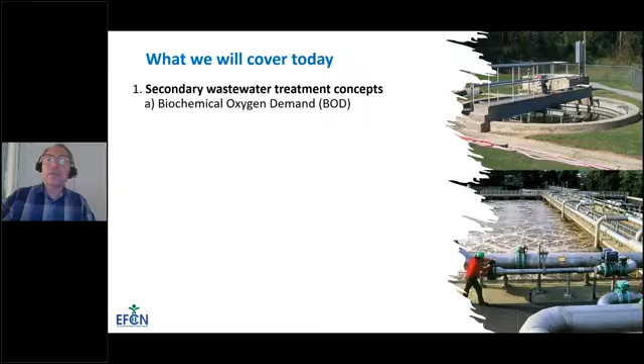Now, today we're going to be covering some different aspects of secondary wastewater treatment. We'll start out by looking at some general principles and delve into biochemical oxygen demand. That's going to be a constant that's similar across the different types. Then we're going to look at activated sludge process control, which is going to cover the food to microorganism ratio and the mean cell residence time calculation.

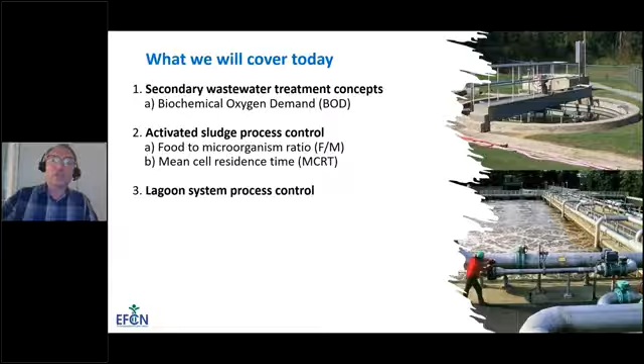We'll even delve into a little bit of lagoon process control. And then we're going to segue into some trickling filter, which is not a suspended process. This is a fixed media process. And we're going to look at organic loading and hydraulic loading. So we're going to look at some different aspects of secondary wastewater treatment, and I'm hoping that we can draw some big picture conclusions. I hope you enjoy the training.

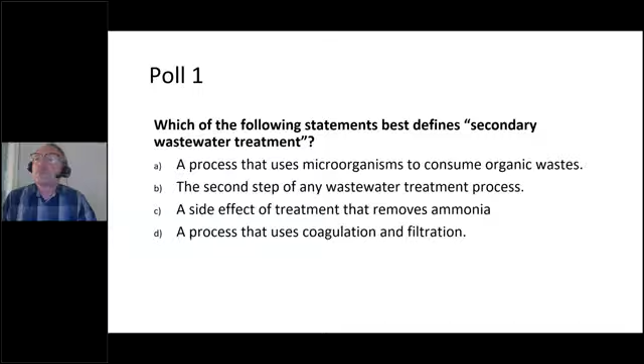We'll go to our first poll now. This poll asks which of the following statements best defines the term secondary wastewater treatment. Owen's going to bring up that poll. I can't actually see the polls, Owen, so feel free to let me know when people have responded and if you could, what the answers are.

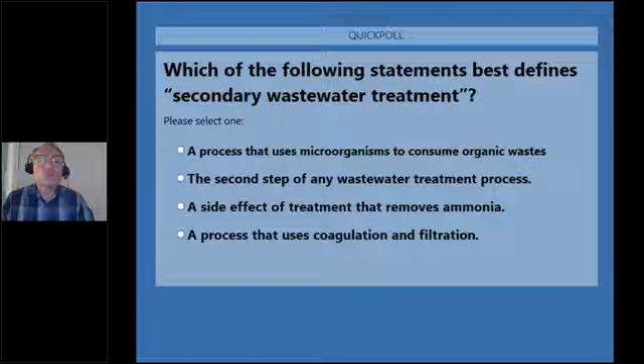Okay, so for the poll results, 71% said a process that uses microorganisms to consume organic wastes. 16% said the second step of any wastewater treatment process. 3% said a side effect of treatment that removes ammonia. And 10% said a process that uses coagulation and filtration.

Okay, very good. Now, if we look up the actual definition of secondary wastewater treatment, that's a term that's used to define any process that uses naturally occurring microorganisms to consume waste. Now it's a little bit of a trick question because it's also called secondary because it follows primary treatment. Primary treatment is settling of settleable solids before the wastewater enters the actual secondary treatment process. The main focus of secondary treatment is to remove BOD.

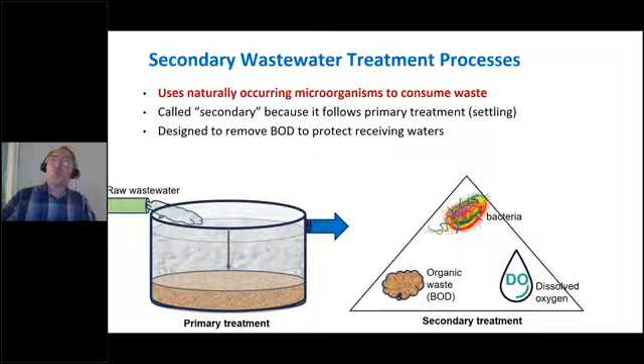A lot of the reasons why we're doing secondary treatment is because if the waste were to get into receiving water, it would continue to cause oxygen depletion because bacteria would be consuming waste in the receiving water, and it would negatively affect the life forms in that receiving water. They wouldn't have sufficient oxygen to breathe, so they'd either move out or die.

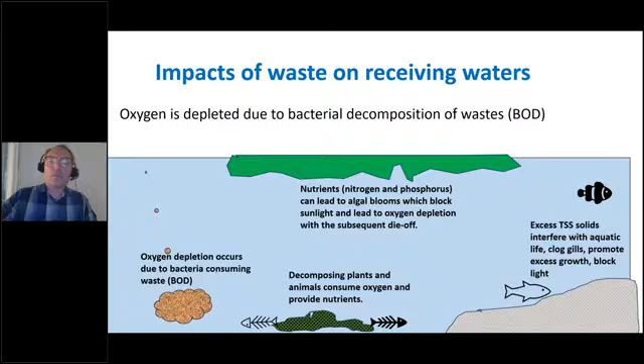Some other things are nutrients, nitrogen and phosphorus, that can lead to algal blooms, and when the algae dies off, that also adds to oxygen depletion. Decomposing matter as a result of all these processes can continue to release BOD and nutrients. And finally, TSS, total suspended solids, can interfere with aquatic life. It can do things like clogging the gills of fish, and also can promote excess plant growth and block light. So these are kind of like the main things that are regulated in an NPDES discharge: BOD, nutrients, and TSS, and of course ammonia as well, which would be toxic.

Now, this biochemical oxygen demand concept is going to be central to all of the process control equations that we'll look at. So let's delve into biochemical oxygen demand for just a little bit here, and we'll define what it is, how it's measured, and we'll end up with a way to calculate the pounds of BOD per day using the pounds formula. So let's look at these couple slides before we delve into activated sludge.

So the BOD is a way to measure the strength of a waste stream. It directly measures the oxygen demand, and it kind of indirectly measures the actual amount of waste that is in a waste stream. So you have microorganisms. When they consume BOD, they require oxygen to do so. And BOD is measured in a 5-day test that measures how much oxygen the organisms are requiring to consume that waste in the sample bottle.

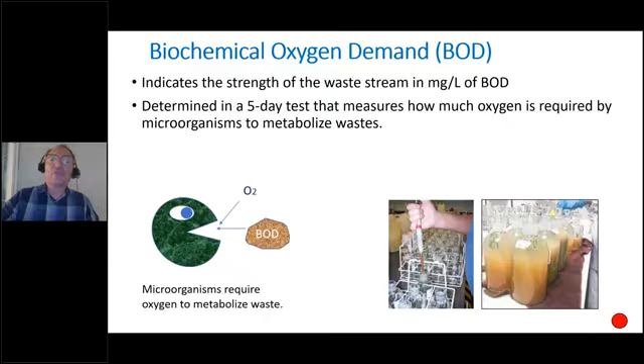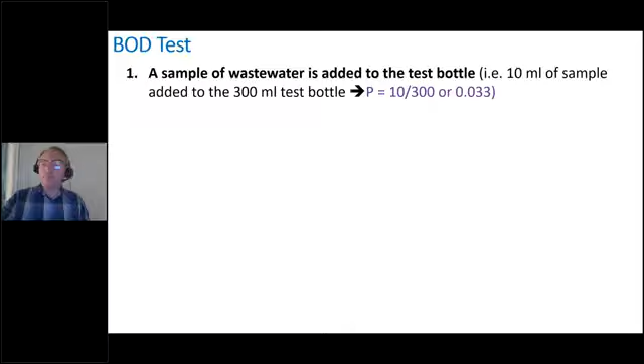So let's look at the concept of how that works. You would take a sample bottle—these BOD sample bottles are 300 milliliters—and take a portion of the sample. For example, if we had a 10 milliliter sample of wastewater, and the rest was makeup water, that would be 0.033, or 1/30th of the bottle as our sample, and the rest would be makeup water.

And we would conduct the test: what is the oxygen level at the beginning of the test, and what's the oxygen level at the end of the 5-day test? We subtract, and in this case we measured 9.85 milligrams per liter of DO at the beginning and 3.42 at the end. We subtract and see that we used 6.43 milligrams per liter of oxygen.

Now remember, that was only 10 milliliters of sample—only 1/30th of the test bottle. So we'd have to multiply that by 30, or divide by our p-value, as they call it. This p-value was the proportion of the sample to the sample bottle, so 10 divided by 300 gives you this 0.033.

So we divide 6.43, our oxygen that was used, by this 0.033, which is the same as multiplying by 30, to get the overall concentration for a whole liter of water. So you see, we have 194.8 milligrams per liter of BOD, and this is foundational to all the process control calculations you might want to do in any wastewater treatment, or to measure the effectiveness of your treatment plant. Does everyone follow that?

Is anybody confused on how BOD is determined here? Give me some feedback if you have a thumbs up where you're good. Are you seeing any feedback, Owen?

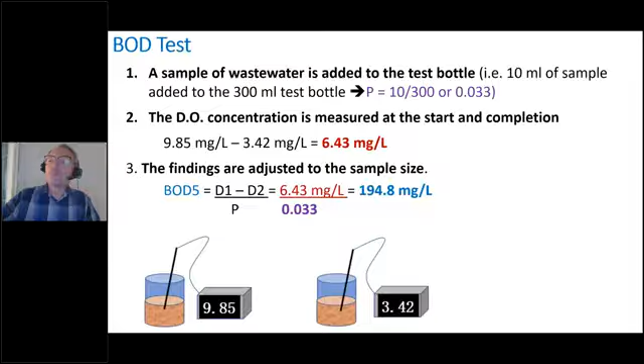I haven't gotten anything through chat yet. Seems like everyone is set. Okay. Yeah, it's looking good. Good, thank you for giving the feedback, everyone.

Now we're going to segue into figuring out how many pounds per day of BOD. We've already figured out how to determine the concentration of BOD. From that previous example, we determined a BOD concentration of 194.8 milligrams per liter. We'll use that concentration in this example.

So we have a plant that has an inflow of 2 mgd, 2 million gallons per day coming in, and the concentration of the BOD is 194.8 milligrams per liter, and we're asking how many pounds per day. So we're going to use this pounds formula: flow in mgd times concentration in milligrams per liter times the weight of water, 8.34 pounds per gallon. Now I'm going to show you how we can just plug the numbers in and use this.

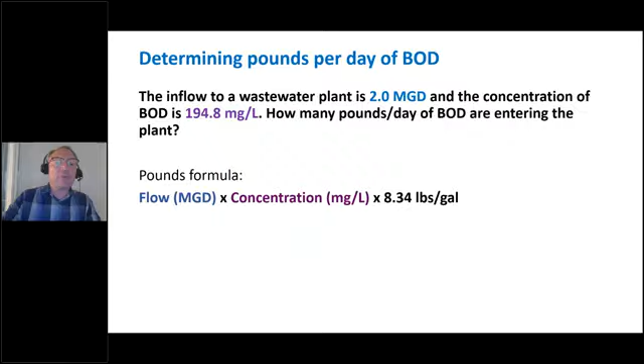Then I'm going to show you a little bit about the pounds formula after this, how it might work. So if we just plug in the known data—2 mgd times 194.8 milligrams per liter times 8.34 pounds per gallon—that'll give us the pounds per day of BOD.

Did anyone calculate that answer for us? If you have the answer, put it in the chat and we'll compare. I might have gotten something wrong, so you have to watch me. You have to get your calculators out and do it.

While they're doing that, someone did have a question. There's two questions that came through. One was about the test bottle—what is it made of? And then also, how do you calculate the p-value?

Yeah, the p-value is your sample size divided by the volume of the test bottle. So your sample size in that example was 10 milliliters, and the bottle is going to contain 300 milliliters of liquid. So 10 divided by 300.

The other portion of the water, the other 290 milliliters, is probably like deionized water. Now, what the bottles are made of, I assume they're glass or Pyrex, but that's probably something we'd have to ask a lab person. I'm not actually a lab person myself. I wish I knew a little bit more detail about it. But let me know if that's what you're getting at. If you send me an email, I do have some additional information I could send you.

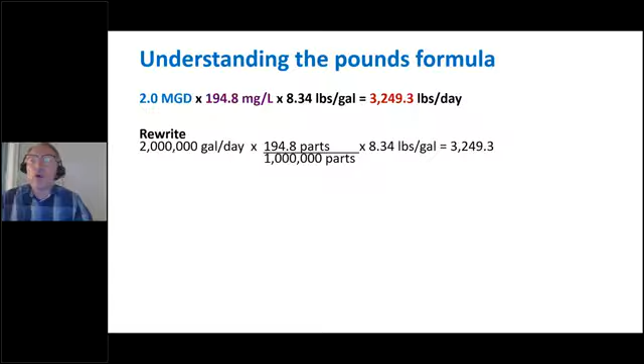and then times the weight of water, I get the same answer. I want to show you something additional.

If we look at the weight of 2 million gallons of water, we just take that 2 million gallons times 8.34 pounds per gallon. So we're talking about 2 mgd, 2 million gallons of water actually weighs 16,680,000 pounds.

Now, the weight of the BOD is 194.8 millionths of the water weight. So if I take that water weight, 16,680,000 pounds, and multiply it by 194.8 millionths, in other words, I times it by 194.8 and then divide it by 1 million,

I also get the same answer. So we're assuming basically that the weight of the constituent, in this case BOD, is a portion of the water weight.

So that's how the equation is somewhat working. I hope that gives you a little bit additional insight into how the pounds formula works. If that was helpful, let me know. If that just confuses you more than you needed to be confused, you can let me know that as well.

I have one person wondering, is the 8.34 pounds per gallon a constant? Yes, 8.34 pounds per gallon is the water weight, and I think it's defined as the weight of pure water at sea level.

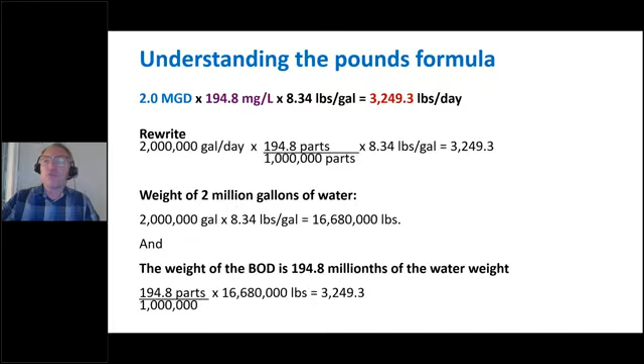But for the water and wastewater topics, I think 8.34 is good, and we consider it to be a constant, yes.

So let's delve into some activated sludge processes. We're going to look at two process control equations. One is the FM ratio, and we're looking at the ratio of BOD coming in, which is the food that we're going to feed to our microorganisms,

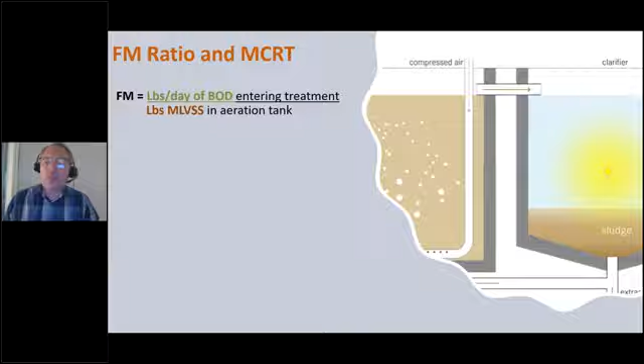and the microorganisms are the pounds of mixed liquor volatile suspended solids, or the amount of the pounds of microorganisms in the aeration tank. And we want that ratio to be fairly constant, or within a certain range.

So we're looking at, do we have the right balance? If we don't have enough food, our microorganisms are going to suffer. If we have too much food, we're not going to have complete treatment by the time we get to the end of the tank.

The MCRT results in a number of days that solids are remaining in the system. So you have the total pounds of mixed liquor suspended solids in the system, and then we divide that by the pounds per day of solids that are leaving the system.

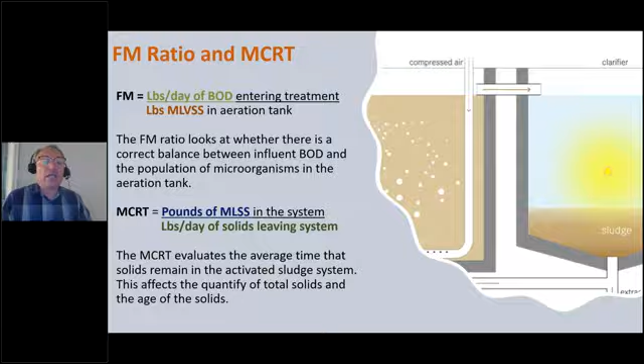So we're going to define and explain those a little bit more, but we're looking at what's the average time that the solids remain, because the solids are recirculated in the activated sludge process, and we're going to delve into that a little bit more.

If we look at the overall layout of a basic activated sludge plant, we have preliminary treatment, which would be screening and grit removal, but then we get to this primary treatment.

The primary clarifier allows settleable solids to be removed, and only after that do we get to the activated sludge process, which is the aeration tank and the secondary clarifier. The aeration tank is where we mix the incoming influent with return activated sludge, heavy with microorganisms. They consume the waste and create a biomass which is settled in the secondary clarifier.

So the secondary clarifier collects a lot of microorganisms that are recirculated back to the aeration tank. We have two flows: the return activated sludge and the waste activated sludge. Remember, we're taking the effluent from the primary clarifier, so the solids in that flow are not settleable—they're suspended solids that wouldn't settle out easily. We have to do something to cause those solids to settle and also to remove the BOD.

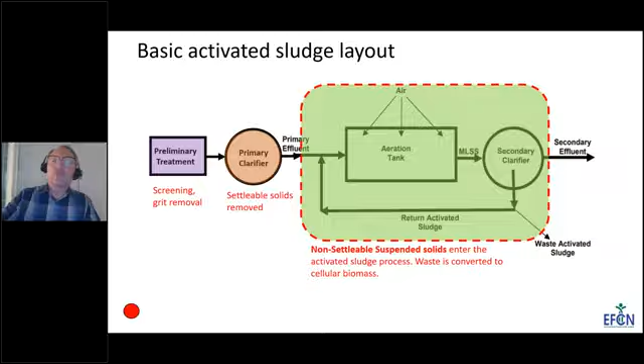So if we focus in on just the activated sludge portion here, there's our aeration tank. We have the primary effluent coming in, and the settled sludge, heavy with activated sludge microorganisms, is mixed with that influent into the aeration tank. So you have food and bugs coming into the beginning of that aeration tank. By the time we get to the end, we hope the food and the BOD are gone, and we have just cellular biomass that settles in the secondary clarifier.

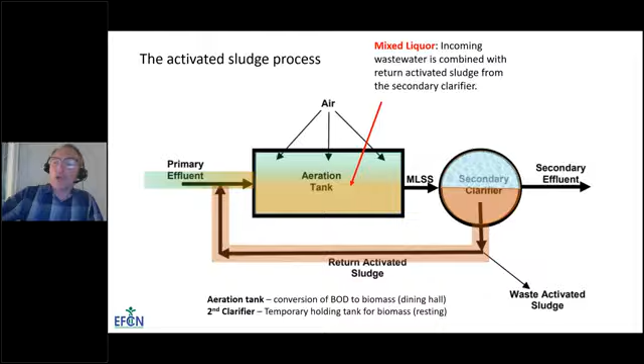This mixture between the return activated sludge and the incoming BOD is called a mixed liquor. You can think of it like a dining hall where we're feeding our microorganisms. So we have this incoming waste and the return activated sludge coming together, creating the mixed liquor.

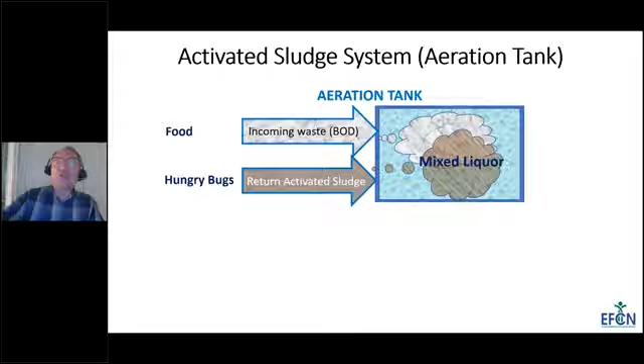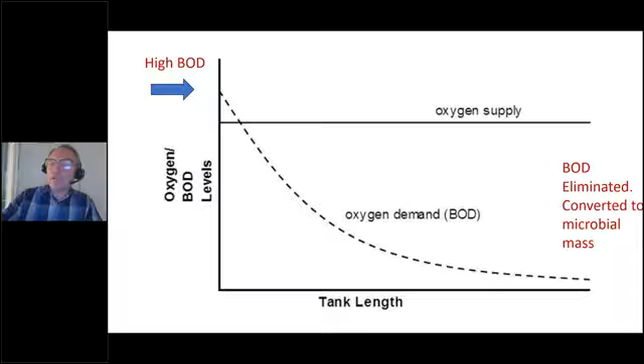At the beginning of the tank, we have a lot of BOD, but there's also lots of bugs, and the bugs consume that BOD and convert it into cellular mass. They reproduce, they grow. At the end of the aeration tank, it dumps into that secondary clarifier. This is where we collect the microorganisms, or the settled sludge, activated sludge.

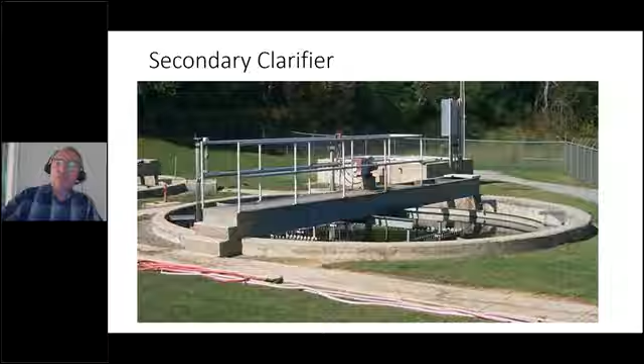And if we look at a diagram of the secondary clarifier here, at the end of the aeration tank, it's mixing—it's being aerated and mixing—and so that discharges into the secondary clarifier and settles.

And remember, the final effluent, the water, keeps on going—the solids remain in the system longer than the water. The clarified water goes out to disinfection, dechlorination probably, and then discharge into the receiving waters.

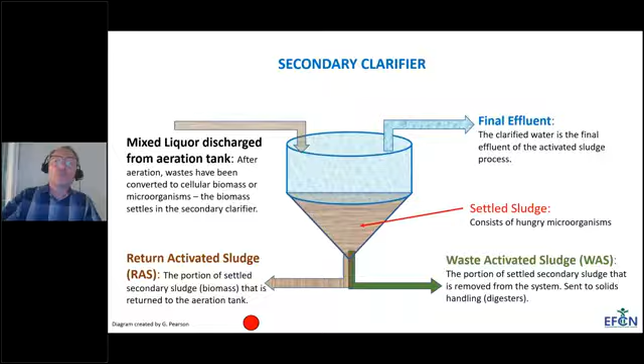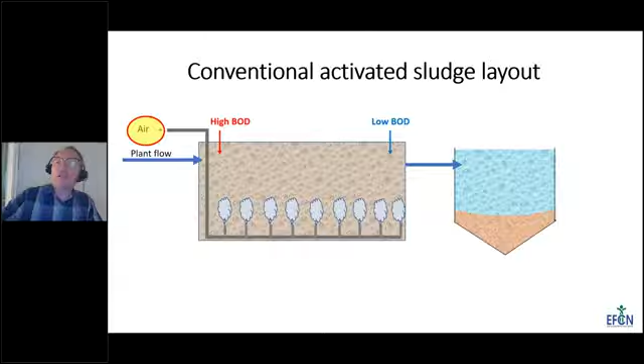And here's kind of how the process might look. You've got the plant flow coming in, aeration and mixing in this aeration tank, and here's your return activated sludge coming in with the plant flow, and then your waste activated sludge. For conventional sludge facilities, the flow might be spending 2 to 5 hours in the aeration tank or so. But remember, the solids are going to remain in the system a lot longer, somewhere between 3 and 15 days, depending.

So we did have a couple questions come in. One was: how much of the RAS needs to be returned? And the other asks: does the RAS and WAS automatically settle to the bottom? Are there any agents used to force settling?

Let me see if I can go back to here as we talk about this. The recirculation rate is generally between about 20 and 50% of the plant flow, and often they'll set it to kind of pace with the incoming flow, 20 to 50%.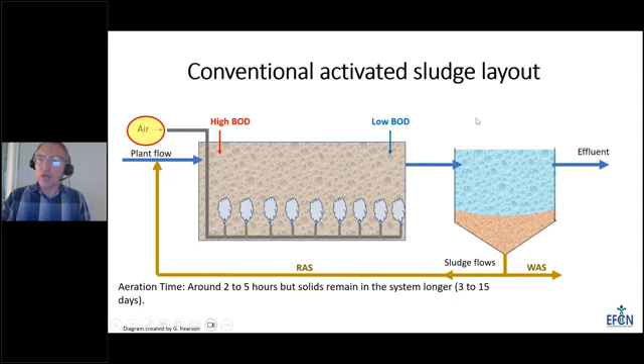One final thing as we continue forward - just to clarify, someone needed clarification on the acronyms FM and MCRT. FM is food to microorganism ratio, and MCRT is the mean cell residence time, which means the average time that solids remain in the system.

Fantastic. Right. Now, we often use these FM ratios as kind of a target range, and you might even want to refine it more. But in general, for conventional activated sludge, we're looking at an FM ratio of around 0.25 to as high as 0.45, somewhere in that range. If you're below that range or above that range, it might signal that you need to adjust.

And conventional systems have higher loading - you're having more food and more air. So 0.25 means you got one hamburger for 4 eaters, and 0.45 it's almost like 2 hamburgers for 4 eaters, something like that. Extended aeration plants like an oxidation ditch may have a lower FM ratio, a lot less food, more time, more solids. So they're operating between 0.05 to 0.15.

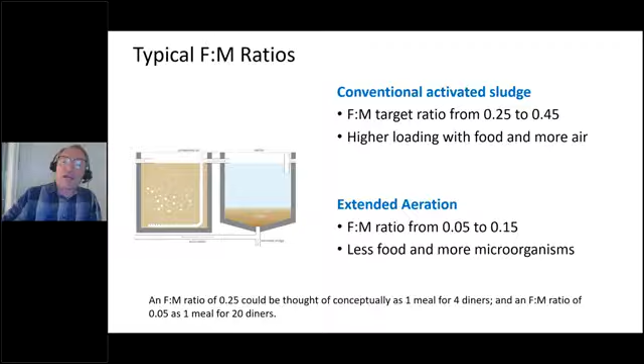Less food, more microorganisms, longer time. Now, food to microorganism is the ratio of the BOD coming in to the mixed liquor volatile suspended solids, which is the microorganisms that are in the aeration tank. So you have the pounds per day of BOD coming in, that's your food. The pounds of MLVSS in the aeration tank is your microorganisms. Now we're going to look at what MLVSS is too and how it's calculated.

But overall, for the food to microorganism ratio, you're going to do two pounds formulas basically to determine this. The incoming BOD - and we calculated this - the top part of this equation is the flow in MGD times the concentration of BOD in milligrams per liter times 8.34 pounds per gallon. Then for the mixed liquor volatile suspended solids in the aeration tank, you're going to need to know the volume of the aeration tank in million gallons times the concentration of the MLVSS times 8.34. So you'll do the top pounds formula, the bottom pounds formula, and then divide to get that FM ratio.

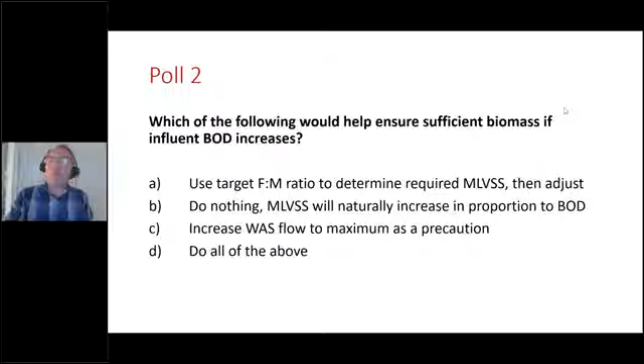And now we're going to go ahead and go to poll 2 here. Poll 2 asks: which of the following would help ensure that there's sufficient biomass or microorganisms if the BOD increases? Depending on your knowledge so far of the FM ratio - you see a BOD increase, how are you going to make sure that there's enough microorganisms using your FM ratio?

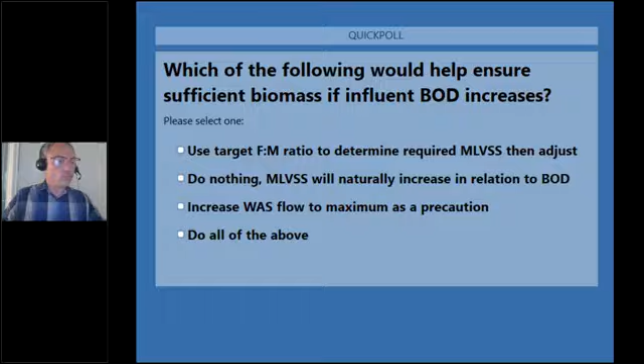We can end the poll there. I will share the results. Okay, so it is pretty one-sided on this. 83% said use target FM ratio to determine required MLVSS and then adjust. 3% said do nothing, MLVSS will naturally increase in relation to BOD. 6% said increase the WAS flow to maximum as a precaution, and 8% said do all of the above.

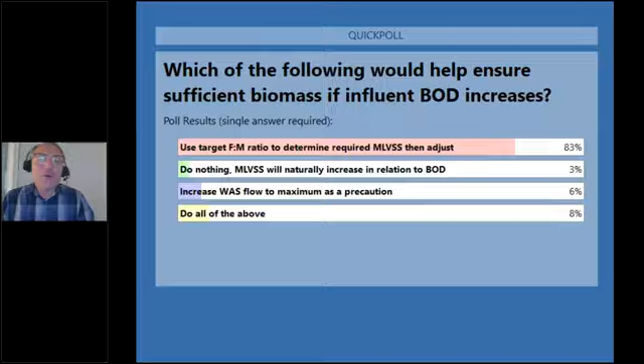The way that you can use the FM ratio is to look at your target ratio and get an idea of how many pounds of bugs we should be including in the aeration tank. So our plant's running fine at a certain BOD. Let's say you're in a tourist town and there's no tourists in the winter. You have a certain level of food coming in, and your microorganisms are just the right amount for that food. But all of a sudden, tourist season hits and your town doubles in population, and now you have this massive amount of BOD coming in, but not enough microorganisms in the aeration tank. So how are you going to know how much you should be shooting for?

Well, the FM ratio would be... can you share your screen again? We're not able to see the slides. Really? Yes, it is kicked straight to your camera. Oh, let me shut that off. Okay, let me see here. Is there something, can you send me a share screen link? Yes, give me one second. I will take it right back. How about now? Yes, now we're good. Okay, I wonder if I accidentally clicked something and did that. Sorry about that, everyone.

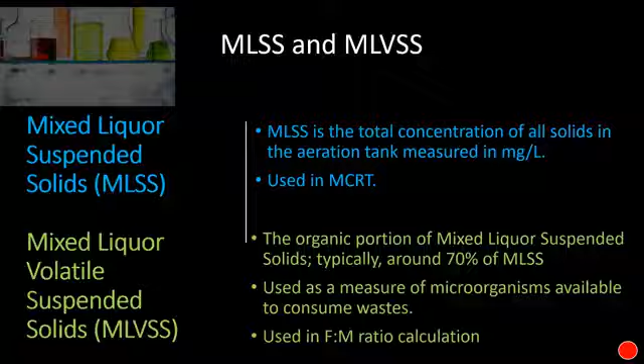First of all, we take a sample and we filter it using a 0.45 micron filter. That captures the suspended solids that are in the sample. Just think about filtering an entire liter of water - we wouldn't filter an entire liter, we'd take a smaller amount. But if you filtered out an entire liter of water and weighed the solids, you'd weigh them in milligrams, and we're going to come out with a concentration as milligrams per liter. That gives you some insight into why that term is in the pounds formula, because we're using those terms to actually see the content of our mixed liquor suspended solids. So we filter the sample, dry the solids we filtered out, weigh them, and then we can calculate the mixed liquor suspended solids concentration.

Here's an example. We take a 25 milliliter sample from the aeration tank. The aeration tank is churning and everything is mixed. You grab a sample, use 25 milliliters of it, filter it and dry the solids, and weigh them. We find that from this 25 milliliter sample, the solids that we filtered out, when dried, weigh 75 milligrams. Now we can put this into our equation to calculate the concentration of MLSS. We take the dry weight, which is 75 milligrams, and the sample volume, which is 25 milliliters, and we end up converting that to liters by multiplying by 1,000.

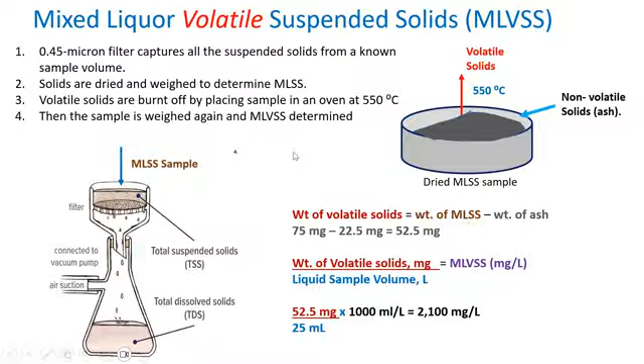Does that make sense to everyone? Give me a thumbs up, or you can give a thumbs down if I lost you on some step there.

Now people are putting into the chat, everything's looking good. Okay, thank you so much for it.

So I went through that because that data is essential to use in our equations. First of all, the FM ratio, we have an example here. We have a plant flow of 3 mgd, a BOD concentration of 275 milligrams per liter, and the MLVSS concentration is 2200 milligrams per liter, and the aeration basin volume is 1 MG.

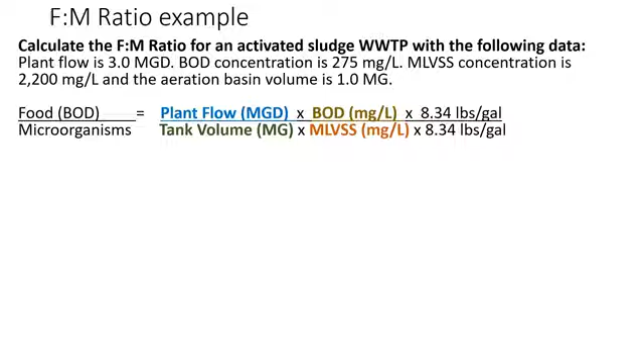So now we know to calculate this, we're basically going to have 2 pounds formulas. The food at the top: plant flow times the BOD times 8.34. On the bottom for our microorganisms: our tank volume of 1 mg times the concentration of MLVSS, 2200, times 8.34.

When we plug our numbers in, there's our food: that's our BOD coming in, 3 mgd times 275 milligrams per liter BOD times 8.34. And there's our microorganisms, 1 mg times 2200 milligrams per liter times 8.34 pounds per gallon. Now, some of you that are attentive and you're dimensional analysis oriented people, you'll notice that we have million gallons per day on the top and million gallons on the bottom.

So with this FM ratio, it technically has the term of day on the bottom. We mostly use it in a way where it's kind of dimensionless, we use it as kind of a dimensionless ratio. But technically, if you were paying attention to that, some people will actually write the FM ratio like 0.35 per day, something like that.

So if we simplify the top and the bottom, the top I got 6,880.5 pounds per day, and on the bottom I got 18,348 pounds of MLVSS. And when I divide the top by the bottom, I got 0.375. That's right in the middle between that 0.2 to 0.45 range. So we're looking pretty good on the FM ratio. There might be reason to still adjust it up or down for your particular plant.

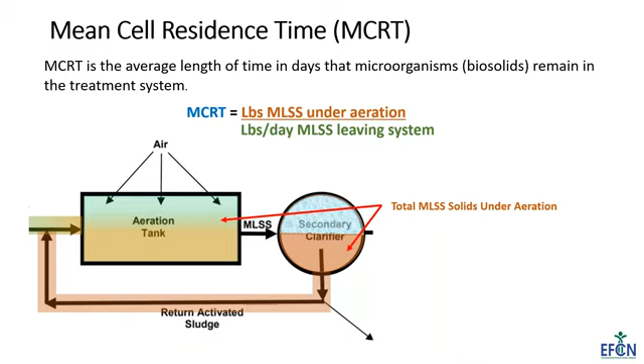Sometimes we can look at just the solids in the aeration tank and the solids leaving as waste activated sludge. Other times it might make sense to also include the volume of the solids in the secondary clarifier and also calculate solids that are leaving in the effluent. I'll show you an example of both of those.

Now here's a very simple one here. What is the MCRT in days for a treatment facility with the following parameters? The aeration tank is 2 million gallons, and the mixed liquor suspended solids is 2,400 milligrams per liter. So that gives us the solids under aeration.

Then we have this waste activated sludge flow, the waste flow from the secondary clarifier, 0.15 mgd, with a concentration of 6,400 milligrams per liter. So that's leaving. Now you notice we can put these numbers into our equation here, pounds under aeration and pounds per day wasted.

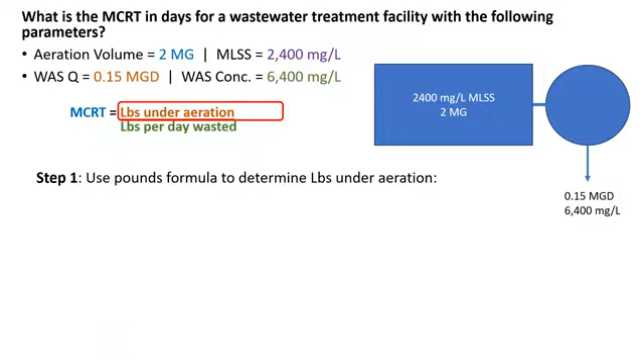We're going to have 2 pounds formulas here. For the pounds under aeration, we have the aerator volume, 2 MG, times the MLSS concentration, 2,400 milligrams per liter, times 8.34, and we get 40,032 pounds that are under aeration.

If we do the bottom part, the pounds per day that are wasted, we have our activated sludge waste flow, 0.15 mgd times 6,400 milligrams per liter times 8.34, which means we're wasting 8,006 pounds per day. You can probably do the math in your head.

Because what we're going to do in step 3 is take the pounds under aeration, 40,000, divided by the pounds of solids that are leaving through the waste activated sludge flow, 8,000. What number is that? I think you can probably do it in your head. Go ahead and type out the number if you have one.

Do we have any answers, Owen? Yes, they're rolling in, 5. Very good.

So 40,032 divided by 8,006 gives us about 5 days. So the solids are remaining for 5 days. And that seems like a good number for a conventional activated sludge facility.

Did I have a question come in? Yes. So they were just wondering, for MLSS samples, what's typically used to be representative of the plant? How many, number-wise, if it makes sense. Could you read that again? How many MLSS samples are typically used to be representative of the plant?

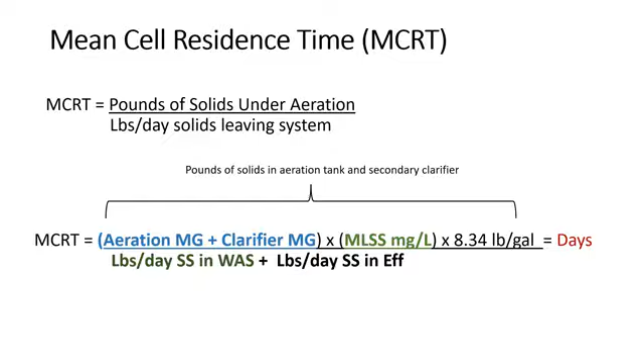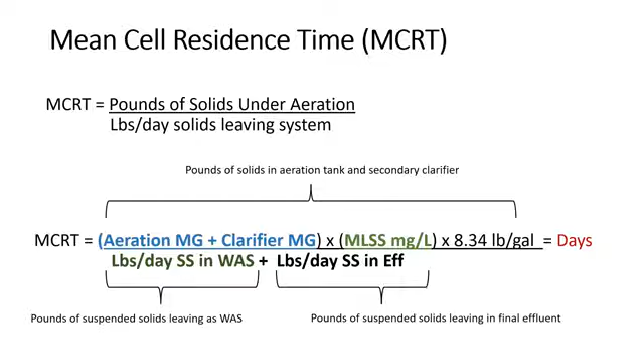On the bottom, we have two different pounds formulas. On the left, the pounds per day of solids leaving in the waste activated sludge flow, which is the majority of solids leaving. But we also add an additional pounds formula to account for any solids leaving in the effluent. It may be a small amount, but sometimes you want to account for everything. This might be a form of equation you'd see on a certification test, and I'll show you how that works here.

Here's an example where we're accounting for everything. We have the aeration tank volume and the clarifier volume. The aeration tank is 1 MG, and the operational volume of the secondary clarifier is 0.25 MG, or 250,000 gallons. The MLSS concentration is 2050. If we put that into the top of the equation, you can see those numbers here. We just added the volumes and used the same MLSS.

On the bottom left, we include the information for the waste activated sludge flow: 0.055 MGD times the concentration of the waste activated sludge, 7,980 milligrams per liter, times 8.34. Then we use the plant flow, 3.25 MGD, and the effluent suspended solids measured in the effluent, 21.2 milligrams per liter, times 8.34. We add those two on the bottom to get the total solids leaving, including the clarifier.

When we resolve those, we get 21,371 pounds under aeration and 4,235 pounds leaving, and it comes out to about 5.05 days. So that is an example of MCRT with all the information.

So let's go ahead and do poll 3 here, where I'm going to ask you to estimate the MCRT for a plant that has 30,000 pounds of MLSS under aeration and a wasting rate that eliminates 5,000 pounds per day of suspended solids.

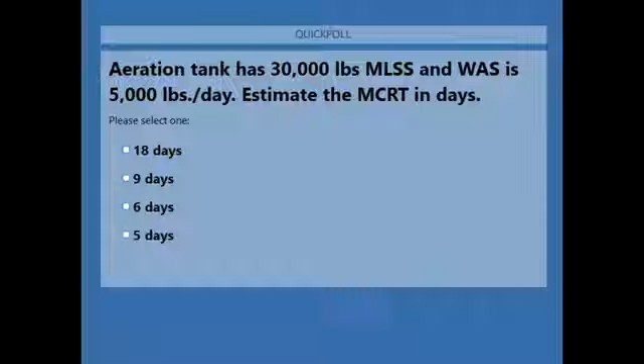Okay, I think we're good to go. So I'll close that out and share it quickly. Top answer was 6 days at 91%.

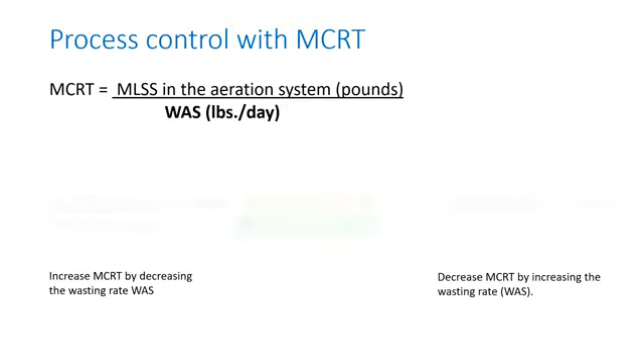Excellent job. 30,000 pounds divided by 5,000 pounds is 6 days. And how we use this for process control: if you increase the wasting rate, you actually end up decreasing the MCRT. And if you decrease the wasting rate, you're holding more solids and increasing the MCRT.

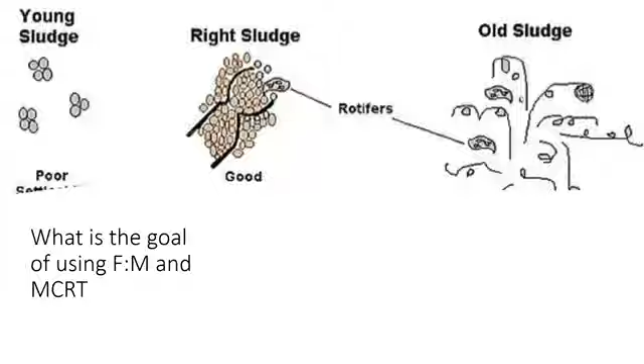The reason why we're doing this FM ratio calculation and the MCRT calculation, there's a couple different goals. One goal is to have a good, healthy sludge. We want our microorganisms healthy enough to remove BOD, so we don't want to overly stress them, starve them, or overfeed them. We want just the right amount of food to microorganisms and the right kind of sludge that settles well and forms floc well.

Here's an example of FM ratio compared to settling. Notice for conventional sludge, this line represents that 0.25 to 0.45 FM ratio range, and that red line shows a lot better settling. You get a lot better sludge density and better settling when you hit that FM ratio, and there are gaps between. So if you were above or below the FM ratio range, you could have problems with settling.

That's why I answered the question earlier about settling the way I did. If you adjust, given that you don't have filamentous bacteria or some kind of toxicity, adjusting the FM ratio could be the solution to getting a better settled sludge.

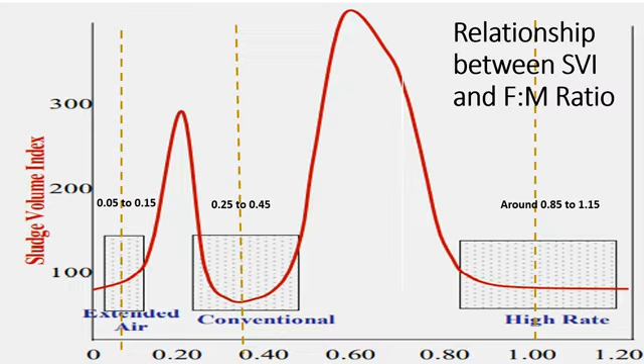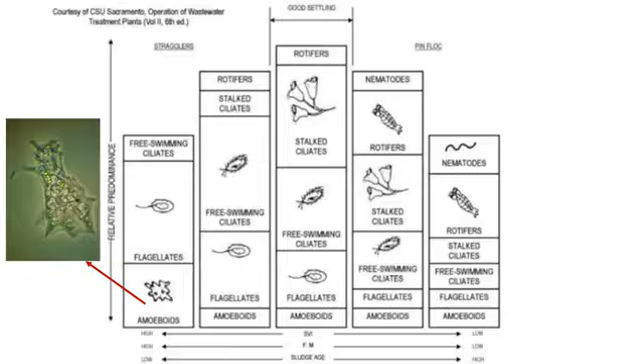Also, if you have a high rate system where you have a lot of food and you're not holding the solids for a super long time, you'll get simpler types of organisms like amoeboids, bacteria, and free-swimming ciliates. Right in the center of a conventional sludge, you'll get a lot of stalked ciliates, but not the real complex organisms. You don't start seeing things like rotifers in large numbers until you have extended aeration, where you're holding solids long enough for more complex species to develop.

And there's a couple things I would say about that. You can look through the microscope to see the health of your microorganisms, to get an idea of the overall age of the sludge.

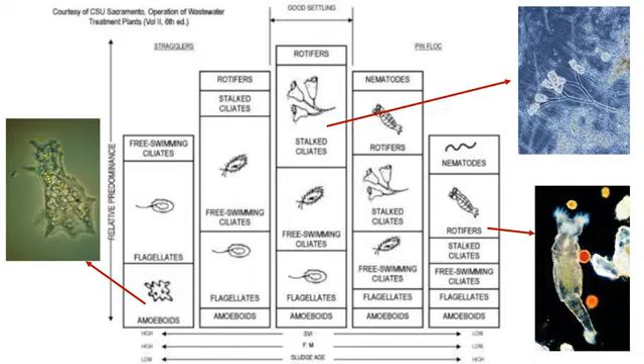All these different types of organisms settle differently. If you have extended aeration, rotifers are going to settle differently than a bunch of bacteria. So it affects the way they settle.

Now let's delve quickly into some lagoon ideas. I wanted to share a typical lagoon treatment system. It's also secondary treatment, usually designed so the first cell is a reactor cell with a lot of aeration, removing most of the BOD. The second cell is where the conversion of ammonia to nitrate happens, and the final cell is just settling and polishing.

Retention time is a big deal because you want to maintain contact between the BOD, the bacteria, and DO as long as possible. So I'll give you an idea of how to calculate the theoretical retention time of a lagoon.

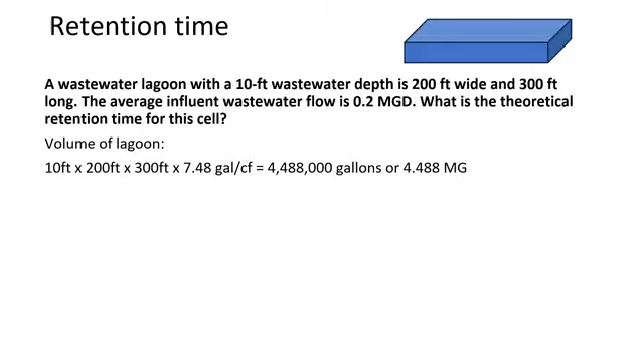We have a lagoon that's 10 feet deep, 200 foot wide, 300 foot long. I calculate the volume as 10 foot times 200 foot times 300 foot, then use the conversion factor 7.48 gallons per cubic foot to convert to gallons. That's a constant, so I get 4,488,000 gallons, which I convert to MG by dividing by a million, or moving the decimal 6 places to the left, giving 4.488 MG. I calculate the retention time by dividing volume by flow, which gives me the time.

4.488 MG divided by 0.2 MG per day gives 22.4 days. But remember, this is just theoretical — we're assuming no sludge buildup and no short circuiting.

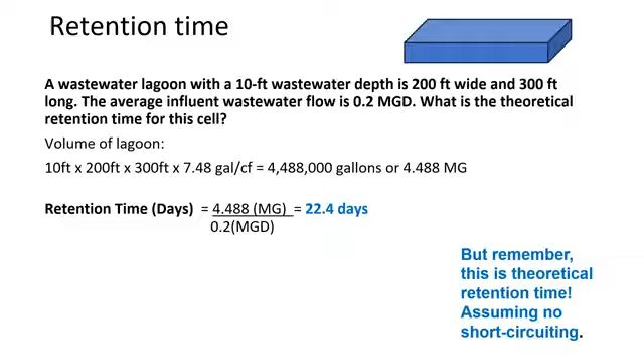Now I'm going to give you a chance in poll 4 to do a similar calculation, but assuming the bottom 2 feet are filled up with sludge and assuming we don't have short circuiting.

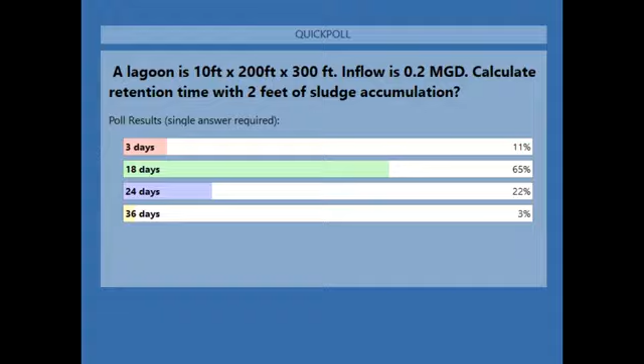The top poll result was 18 days at 65%. Excellent job. Because we no longer have 10 foot depth — we have 8 foot depth since the bottom 2 feet are sludged up — that reduces our volume to 3.59, and divided by the 0.2 flow gives us about 18 days.

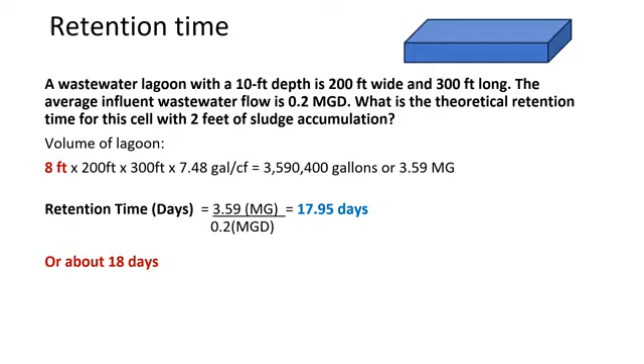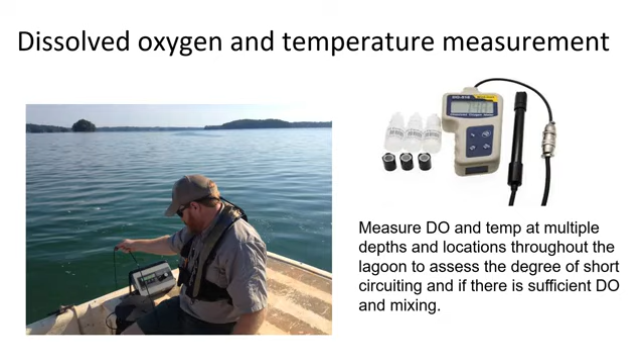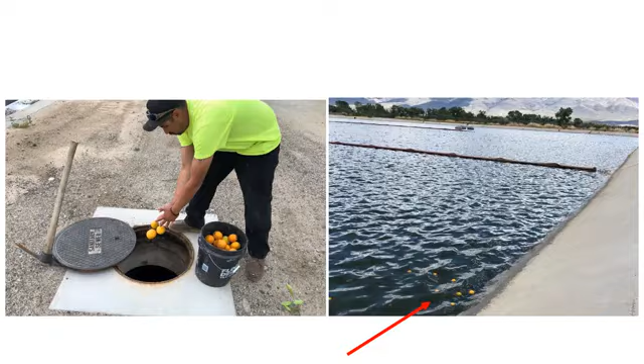Some things you can do to evaluate short circuiting: measure the dissolved oxygen level and temperature at multiple depths and locations in the lagoon — that'll let you know if you're getting good enough mixing. You can also put floatable objects in the inlet and see what path they take and how quickly they move from inlet to outlet. In this instance, floating fruits made it to the outlet in about 6 days, significantly less than 20 days — it was taking a shortcut down the berm.

They moved the floating aerators a little bit to force that flow to take a different direction, and they increased the retention time by about double — so they doubled the treatment.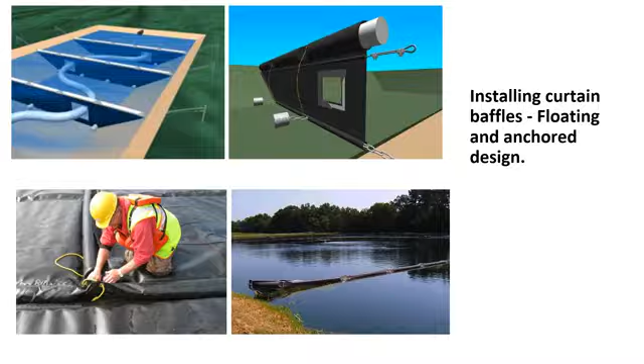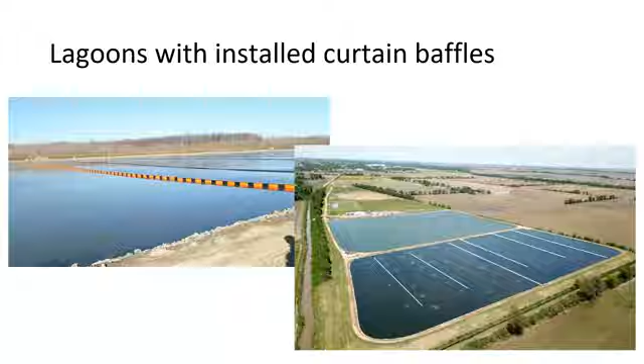You can also install floating baffles. These curtain baffles have a flotation device on top and an anchor at the bottom, forcing the wastewater to take a serpentine path through the lagoon. Here's an example of some lagoons — you can see the baffles forcing that serpentine route, which gives you better treatment.

Let's move right on to trickling filters. In this case, the microorganisms are not suspended, they're an attached growth as a biofilm to media, and the wastewater trickles over and through the trickling filter. The trickling filter has either synthetic media or rock, and the biofilm grows on this media, and it's sprayed and distributed throughout by a rotating spray device.

There's a recirculation flow that brings treated water back from the clarifier, that can be added to the influent to decrease the organic loading. So if you have a real high BOD, you can add recirculation water. It reduces it down to a level that biofilm can handle. And when you recirculate that, you're also adding to the hydraulic loading though.

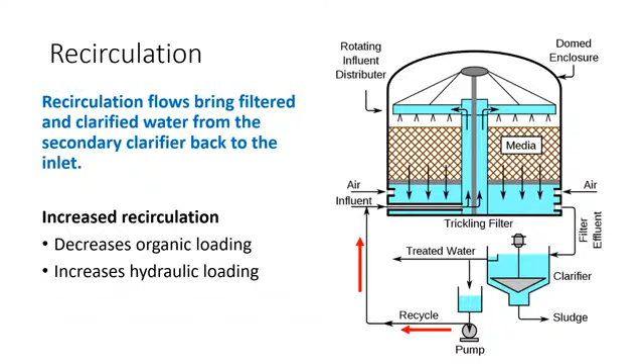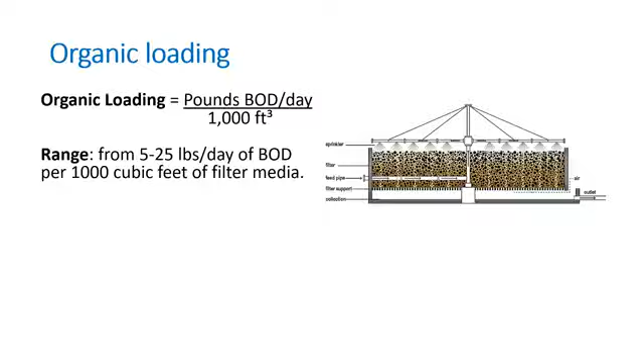The organic loading is calculated as pounds of BOD per day for every 1,000 cubic foot, and we want that to range between about 5 and 25 pounds per day. The lower pounds per day are for systems that also want to treat ammonia and have nitrification occurring. And keep in mind that 1,000 cubic foot is part of the units that we want to end up with, and I'll show you how we do that.

If the organic loading is too high, we could have excessive biofilm growth and even have septicity, and it could clog the trickling filter and cause some problems. The excessive biofilm growth would actually also reduce nitrification. If it's too low, you're not feeding your microorganisms enough, and they can become unhealthy.

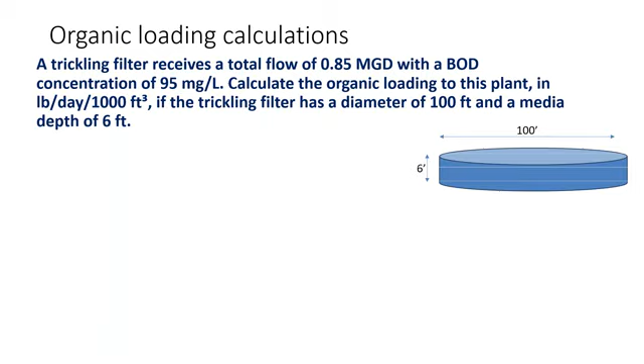Here's an example of an organic loading calculation. We have a total flow going to this filter of 0.85 mgd, and the BOD concentration is 95 milligrams per liter. We want to calculate the organic loading per day per 1,000 cubic foot. The trickling filter is a large one, with a diameter of 100 feet and a media depth of 6 foot. Here's a little diagram of our trickling filter, not to scale, but 100 feet by 6.

So first of all, just like the other process control, we calculate the pounds per day of BOD. 0.85 mgd is our flow, 95 milligrams per liter is our concentration of BOD, times 8.34 pounds, means we're adding 673.5 pounds per day of BOD to this filter.

And then we calculate the volume of the filter. I'm using D squared times 0.785 instead of pi r squared. So diameter times 0.785 times the depth: 100 feet times 100 feet times 0.785 times 6 foot gives us 47,100 cubic foot. That's our volume in cubic foot.

Then we simply divide those two numbers: 673.5 pounds per day divided by 47,100. But notice what I did on the bottom there. I separated out the 47.1 from the 1,000 cubic feet because we want to retain that 1,000 cubic foot in our units, so we can compare apples with apples. So you notice I took 673.5 divided by 47.1 to get 14.3 pounds per day per 1,000 cubic foot. Let me know if that makes sense to you, the way I did that at the bottom.

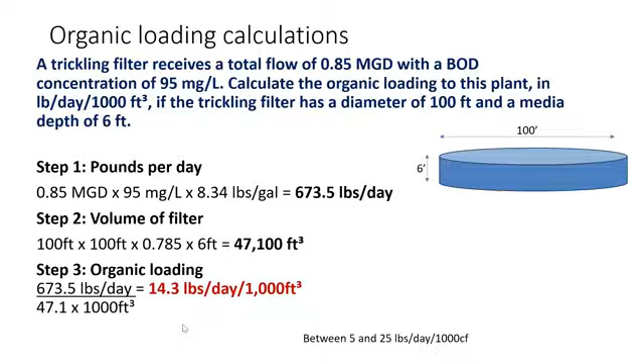Notice also this is between 5 and 25 pounds per day, so we're in the range. For the hydraulic loading rate, there's a range between 25 and 100 gallons per day per foot. If it's too low, you won't have enough water to clean the filter, so you could end up getting clogging and filter flies and septicity. If it's too high, think of like a pressure sprayer, you'd be washing off the media, the biofilm, unnecessarily, and you'll see increased sloughing in the effluent.

So if it's too high -- did my audio click off for a second there, Owen? Yes, it did. Oh, did we lose anything, or was it just a second? It was a solid 5 seconds or so, we missed a chunk of that. Oh, sorry about that, everyone.

So here's where we were discussing the hydraulic loading rate: plant flow in gallons per day divided by the surface area of the filter in square feet. So we're going to try that. We have a filter that has a diameter of 60 foot, and the flow is 0.15 mgd, and the recirculation rate is 0.13 mgd. We're separating out the inflow from the primary clarifier and the recirculation, so we're going to have to add those together to get the total flow. And we're going to calculate the hydraulic loading rate on the filter in gallons per day per square foot.

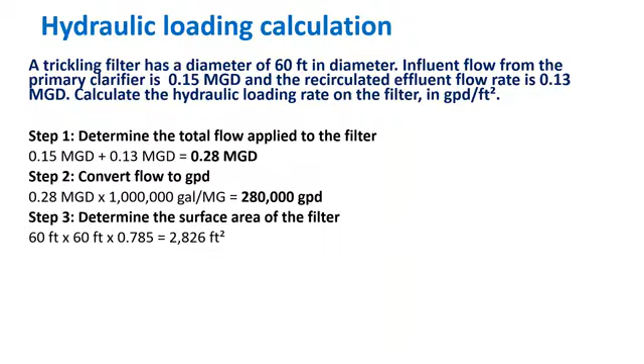Now we have everything we need to complete this equation: gallons per day divided by the area. We get a hydraulic loading of 280,000 gallons per day divided by 2,826 square feet, which gives us 99.07 gallons per day per square foot. Technically this is within the range, but it's a pretty hot hydraulic loading rate, and we might actually be getting some unnecessary washing away of our media, so we'd have to watch that. It's definitely on the high side.

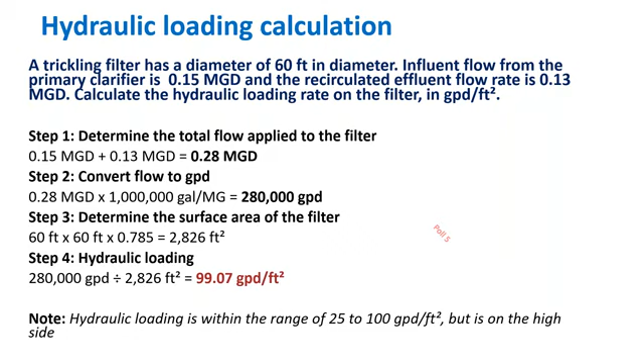And we'll do our last poll here. The question is: the operator of a trickling filter plant in a resort community detects signs of excessive biofilm growth at the onset of the tourist season. What would we do?

I'll let everyone know we're going to be over in time. So the questions, I've collected the questions. I think what we'll do is I will send them over to Greg, and then in the follow-up email we will send them out, so you will have your responses. If anyone wants to hang around, or if it's kosher to hang around a little bit, I will hang around as long as there's reason to.

I'm thinking we'll probably send them over to you just because we have like 10 or 12 questions rolling in, so it's probably going to take quite a while. Well, thank you everyone for putting up with my slowness today.

Okay, so I'm going to close out this poll. Results wise, 58% of people said increase the recirculation rate, and 25% said decrease the recirculation rate. 10% said add additional BOD to stimulate the process, and 7% said dose the influent stream with mild chlorine solution. And most likely...

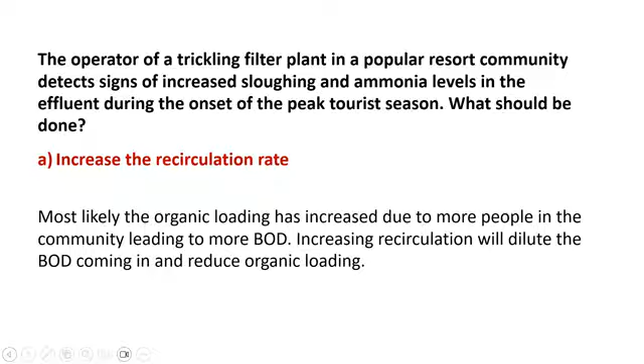This tourist town at the onset of the tourist season has experienced increased BOD. So the BOD is increased, and it's causing this excessive growth of biofilm. That's a sign of a bit of organic loading or overloading. So we can increase the recirculation rate, which adds treated water and dilutes that BOD. That would be one of the first things you could do.

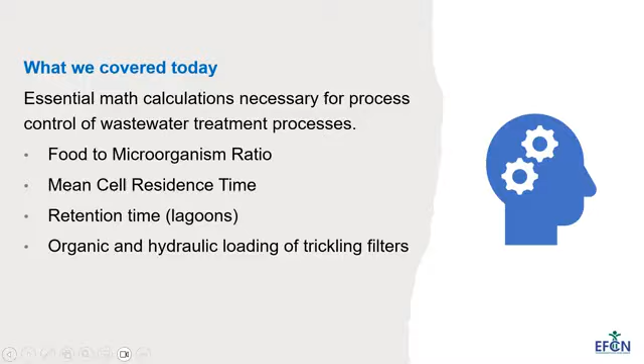So that's what we covered today. We spanned a large portion of process control for secondary wastewater treatment processes. We looked at F/M ratios, MCRTs, retention time for lagoons, and organic and hydraulic loading of trickling filters. This was a bit of an experimental webinar I did because I tried to cover a large portion so we could make connections between secondary treatment processes that are common and look at how they manifest themselves in activated sludge, lagoons, and trickling filters. I hope you enjoyed it.

If you have something you enjoyed learning about today that you'd like to share in the chat, you're welcome. Owen's going to take care of the questions and send them to me. I'll also share my email here: gpearson@mtu.edu. If you want to ask me anything directly, you're allowed to do that, and I'll do my best to provide information and answer your questions. That's all for me. I'm going to be quiet now and let Owen take it over from here.